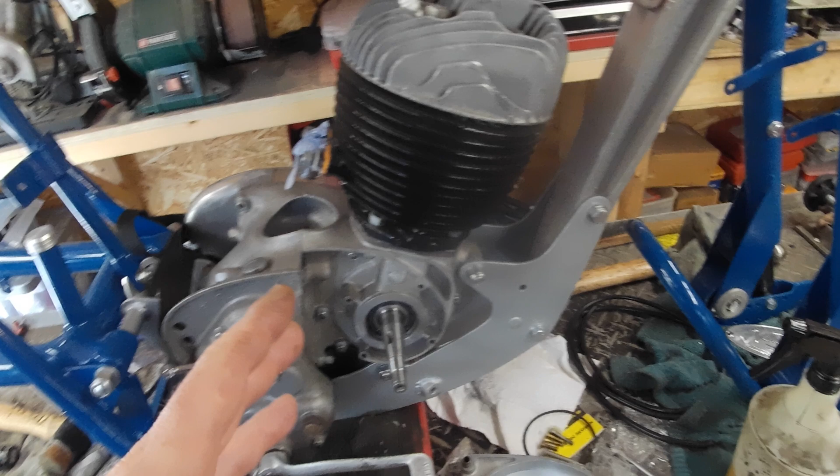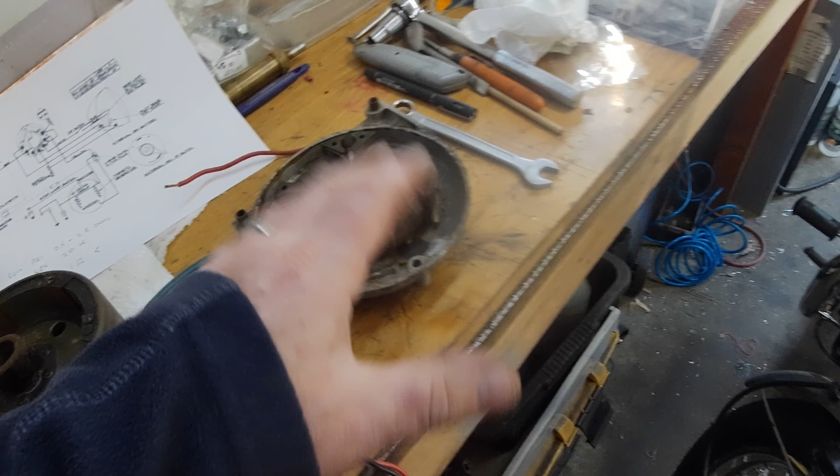Or just with the condenser, change it to a, you should be able to fit one in here, I think, like a car type condenser, or modern motorcycle type condenser. That's one option you can do, which is probably what I'm going to do.

And the other failing is with the pickup. I can just see that in there. So your normal HT lead would come in through here, and sort of like a spring-loaded carbon pickup onto that little bit there, little dimple in there. The way around that, because that is a major point of failure, that carbon pickup.

I remember years and years ago a mate of mine had a Greeves, and yeah, most things ran okay apart from that, it would just occasionally fall out and you'd lose all the ignition. Then you'd have to fiddle around and mess around with that. So the way around that is just to directly solder your HT lead onto there and do away with the carbon pickup and all that. Yeah, so that is what I'm going to do to start with anyway.

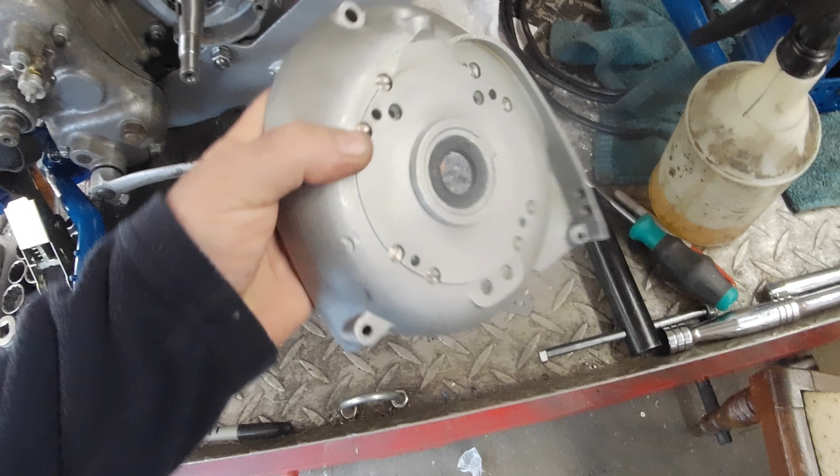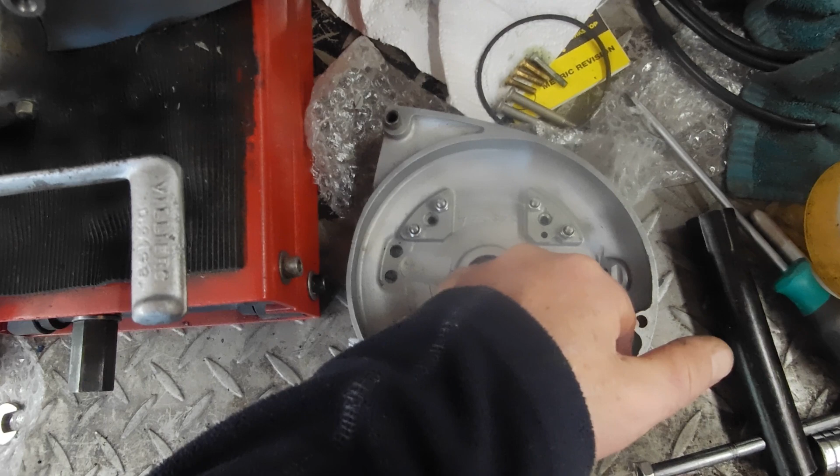I'm going to use this. This is the one that came off. It's in a slightly better condition than this. I mean, this probably would clean up, but I'm just going to remove everything from there and replace it onto there. That's also got a new oil seal in there as well, so I'm going to use that one. Yeah, I want some Delrin, just going to make up a little plug to go in here, bore a hole in for the HT lead to come through, so that will solve that little issue there.

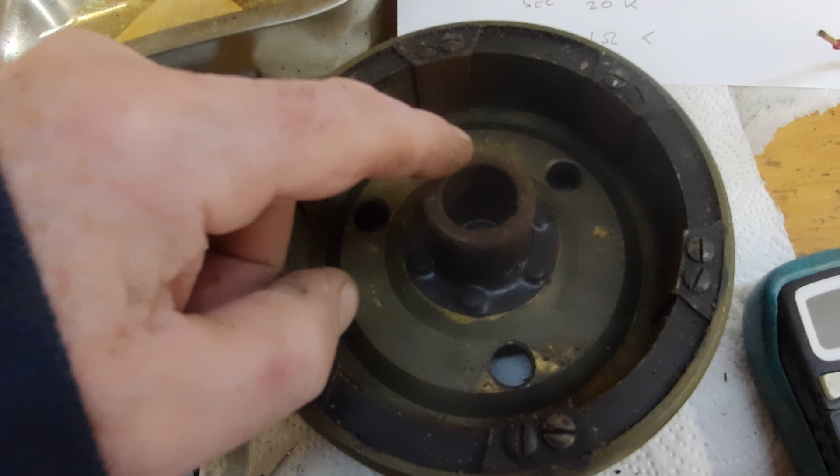Yeah, and there's the mag. Looks rusty around here. There's a bit of rust around here. That'll need a bit of clean up, but actually the taper is smooth. There's no rust in there. That's a nice taper. So that should be okay. And we do seem to have plenty of magnetism. So yeah, I think we'll be okay.

This obviously needs a good clean up, as does everything in there. That, hopefully that thread will be okay. Yeah, so I think that'll be the first thing I'll do. I'll just give this a good general clean up. Oh yeah, I'll just test the coils as well. We'll have a look at those.

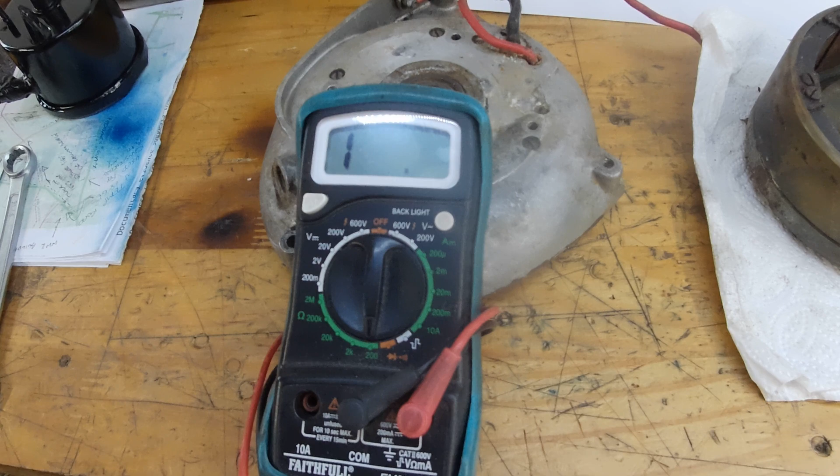Couldn't find an exact measurement for the lighting coils, but apparently as long as they're under 1 ohm, they should be okay. And primary on the ignition coil between 0.5 ohm and 2.5 ohms. Secondary should be 20k. So we'll just have a little look at that for interest. Set that to 200 ohms. If I can get that in shot somewhere. There. We'll do it. Right, let's just get a nice ground somewhere.

Point 0.5, 0.3, yeah, so we've got continuity. I'll drop 0.2. 0.3, 0.2, yeah. Right, let's try the other one. 0.5, 0.4, 0.4. Yeah, so they should be okay. Right.

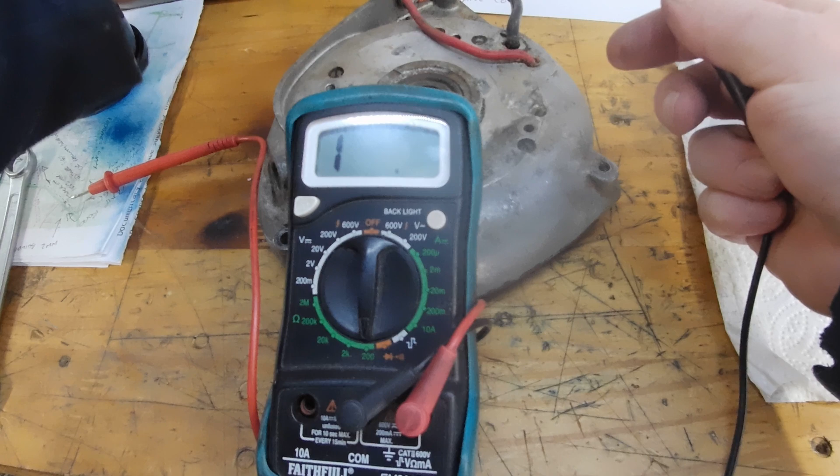What have we got on here? Looks a bit heavyweight, that bit of wire. On there. Point 7. Point 6. Yeah, so that's within spec. That's the primary. Right, to do the other one is a bit more tricky.

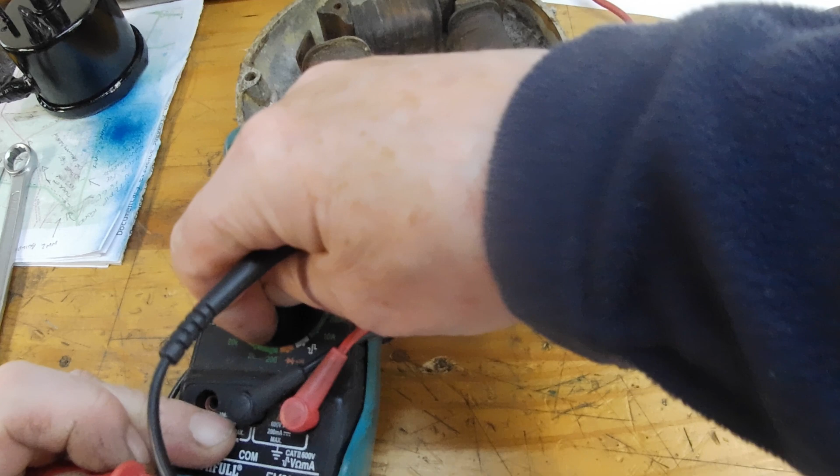Right, set this to 20k. Get a good contact there. Well, nothing. Let's try 200k. No, I think that is no good. Nothing on the secondary at all. Let's just try continuity. No. So yeah, just as well I ordered that HT coil.

Right, so the next thing, I think, start stripping these off. That don't look that good. Right, I want to reuse this socket, this little connector here. I have to just desolder these. My battery is getting a little bit, yeah. Need to charge my battery up, I think. That should be steady green light. Fired up the main soldering iron while we're waiting for that battery to charge.

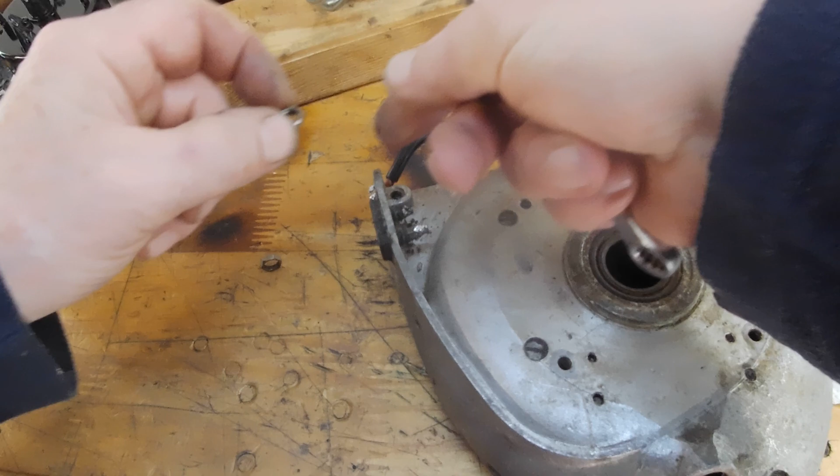That's some funny old solder on there. To throw a bit of modern stuff on it to get it to go. There we go. Right, clean them up later. Soon that just pushes out. Hasn't been glued in. Yeah, some sort of gunk around it.

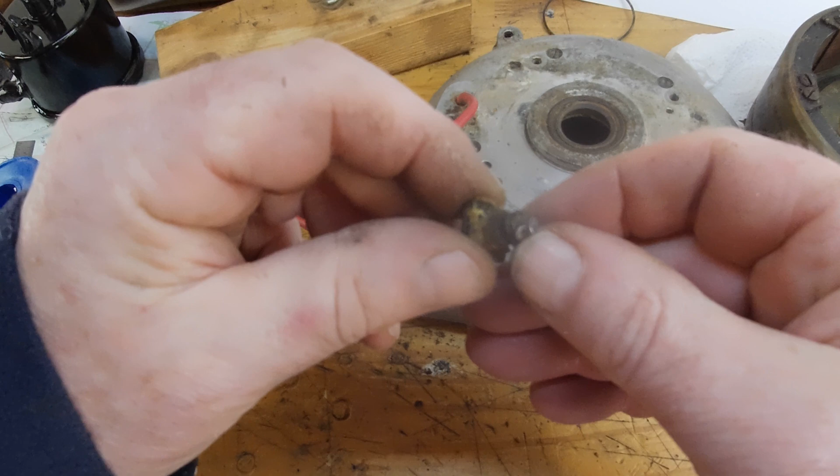These separate individual things. Oh, they are actually. Thought that was a pair. Looks like they're individual. Right. That was one that looked like the thread had gone a bit. Yeah, I'll clean it up a bit first, I think. Right, that's those off. Right, coils. I need to keep these end pieces, I think, if I can reuse them. I will. Right. Screwdriver.

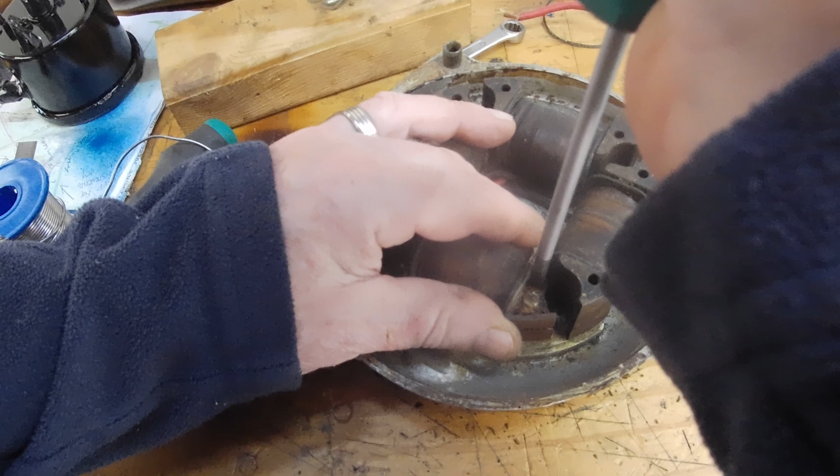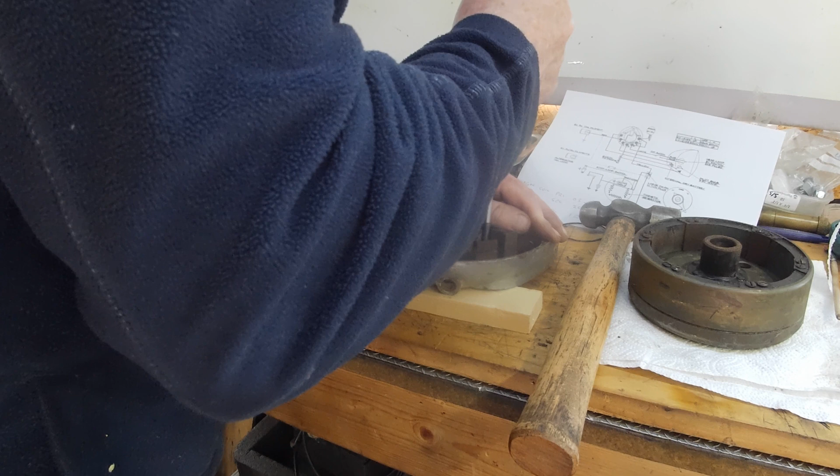Oh. Tight. Right, might have to break out the impact driver, I think. It's moved. Loose. Loose. These ones need a bit more.

That one. It's just this last one is a bit. That one does not want to go. Oh, hell no. That's always the last one. Might have to drill that one out, I think. That does not want to move.

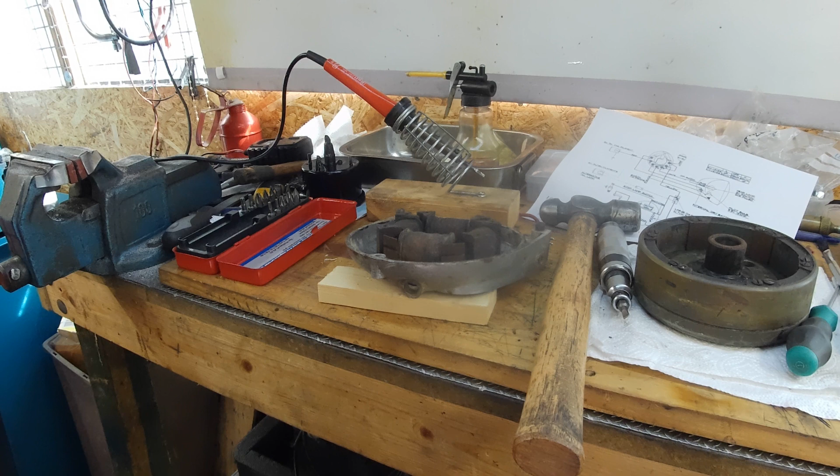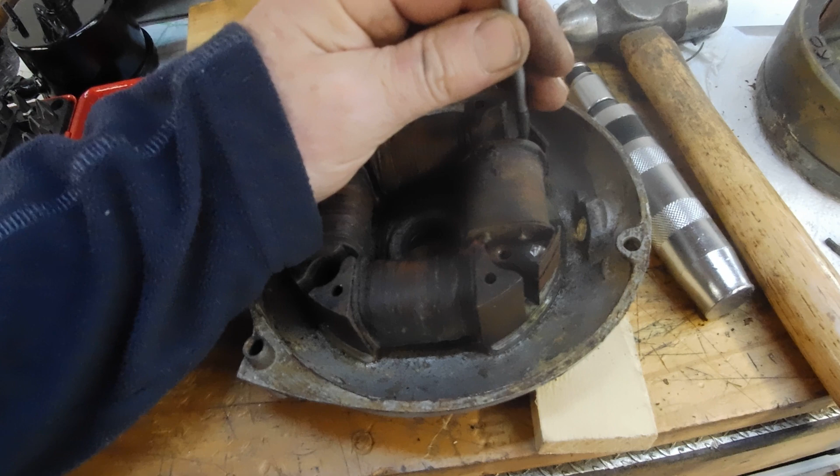No, that ain't going to go. Drill that one out. These other ones are all loose. Just that last one. Yeah, I'll leave them in place while I just drill this out, I think. Pretty corroded. Threads are right, it's just the countersink and the shank.

Ah, different sizes. Right, hopefully. Can I move this now? If I can ping the end off, because that is still under there. Might need to drill a bit more off there, I think. Try not to go too far because I don't want to upset the countersink. Yeah, I'm going to have to drill in there again.

Right, got it off. I thought these were reusable, these ends, but perhaps they're not. Perhaps I need to get new, perhaps they changed the design or something. I thought these sort of come off, because the new coil has just got pins on the end, so you need some sort of mounting. Yeah, they don't seem as though they're removable, so all that was a bit pointless. I suppose I can get the little bit of mica out of there, the insulation. Can reuse that.

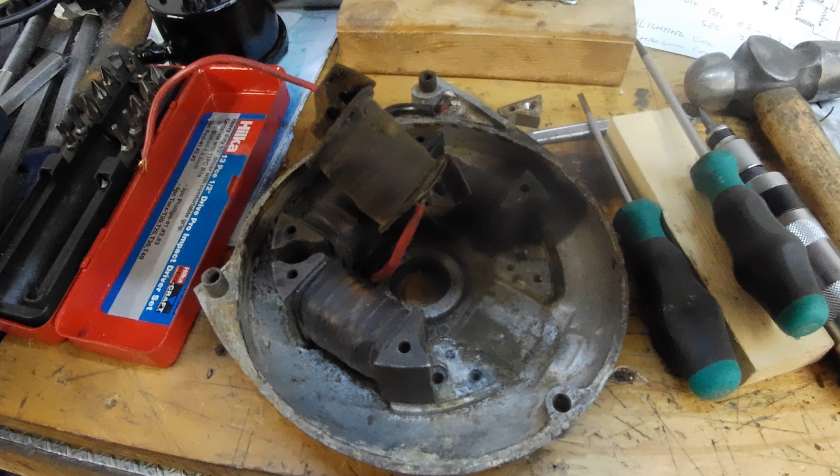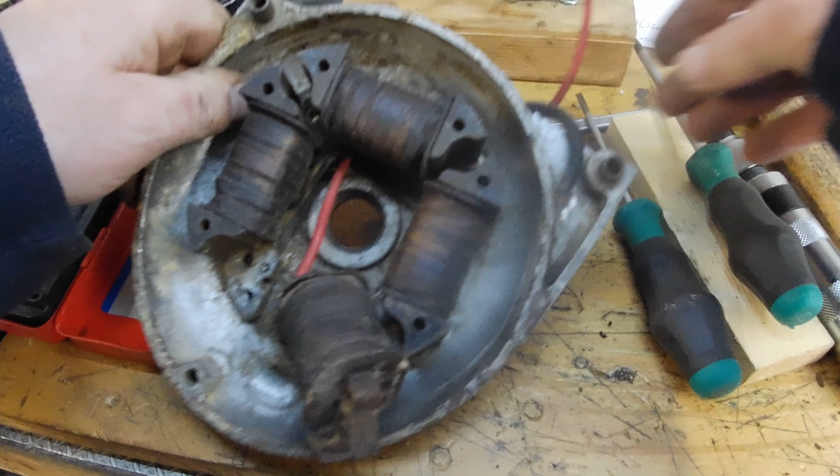Yeah, couple of the screws I can reuse. Yeah, that's why I was having trouble drilling that out. I didn't exactly get in the centre. That don't really matter. Yeah, I think I do need those, so we'll keep those. Yeah, coil is off. There seems to be a load of sort of gungy stuff here, where someone's tried to seal the wires up, the looks of it.

Yeah, I don't quite know what that is. Right, I should be able to get this. Can I get that out there now? No, I need to remove these, I think, first. Yeah, I mean, you can see the little contact there better now, where the little carbon bit sits. Right, I'm going to have a look and see if I can actually get... Oh, that's off. Solder's broke. Yeah, see if I can actually get these, because they don't seem to be removable.

Right, these other ones come off from the rear, and do I want to number them? No, I shouldn't need to number them, because they'll be connected to, one's on the yellow wire, one's on the red wire. Yeah, they just screw in from the back, and let's hope that they aren't so difficult to undo. Well, that moved, I saw it. And that one. Right, I'll just carry on round and release them all.

When they work, they really work. We're going to have a last screw scenario again. Oh, shit in there. Loose, loose, loose, loose, loose, and loose. Right, okay, I'll get those off. Right, screws are all out.

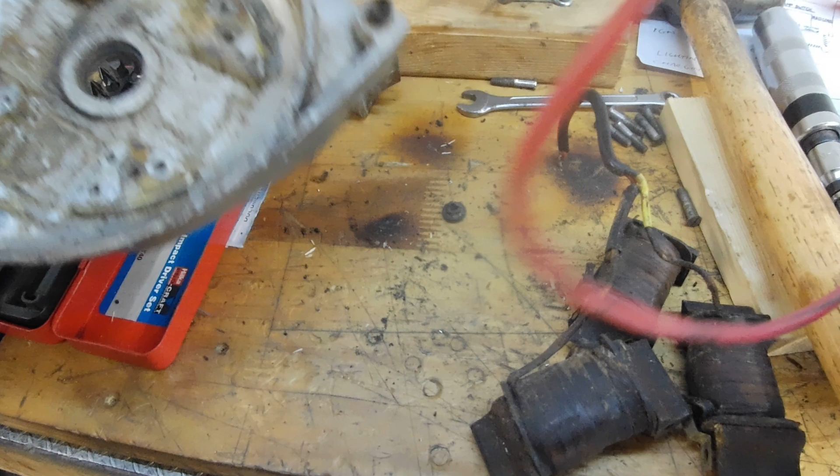Some sort of earth there, yeah. These wires might need replacing. What's that? Oh no, it's a bit of sleeving. Right, coils. That's probably why that gunge was there. Probably should be another little grommet on that one. Right, that's that lot off. I shall now need to do a little bit of cleaning, which you won't want to watch because that's boring. And well, that wire is damaged there. Actually, I'll probably need to replace these wires, I think.

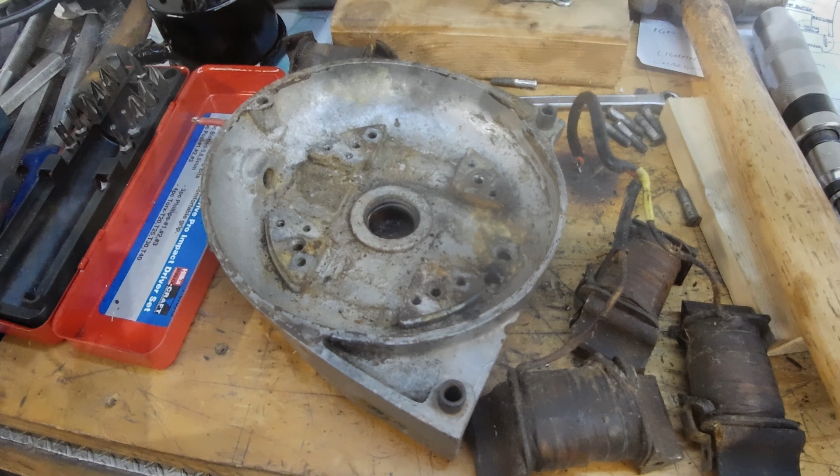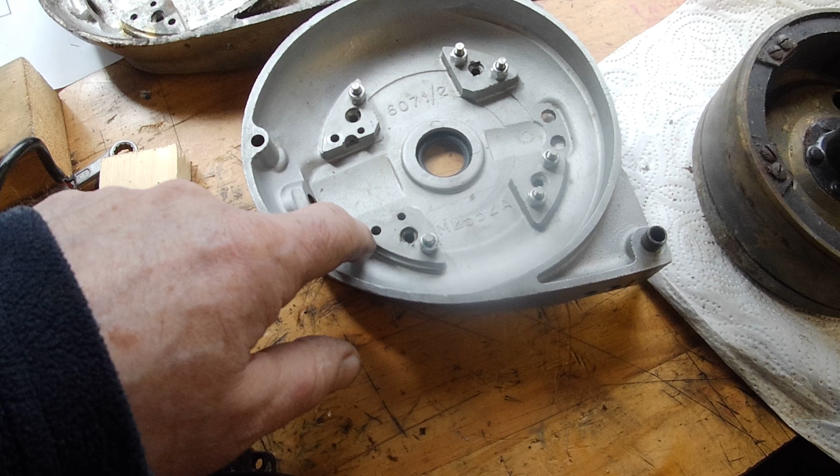Right, a little bit of a problem if I want to use this. I've just removed the screws that were in these fixing holes, where that will go, and someone has drilled out the threads. So they should be threaded like they are on there. The other ones come through from the other side, so it doesn't matter. So that's a bit of a problem because there's just not enough gap there to get a nut on the top if you want to come through from the other side with a screw or a bolt. You'd never get a nut on the top unless you milled a bit away, and I'm not sure how much I'd have to take away.

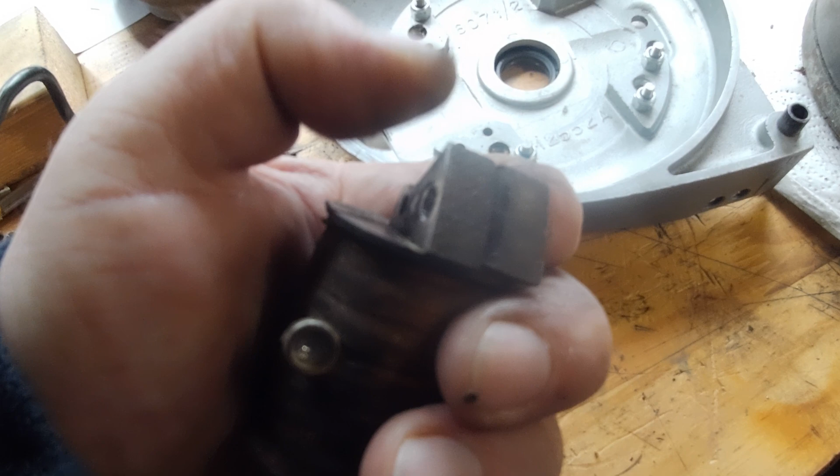I really took a little bit off that one because that's where I did a little bit of a repair, where I drilled that in the wrong place. I just had to sort of plug it. Unfortunately, that did wander off a little bit because this laminated part of the bracket is a little bit softer than the steel I put in, so it was trying to pull one way, but it'll hold down, that's not a problem.

Yeah, so I'm going to have to clean up this one, which is not in as good a condition as that one, I don't think, which is a bit of a shame, but there we are. And I'll also have to take the oil seal out of there and put it in here because this one is no good. So yeah, a little bit of a clean up to do, and also these want a little bit of a clean up, and I am going to do a little bit of rewiring.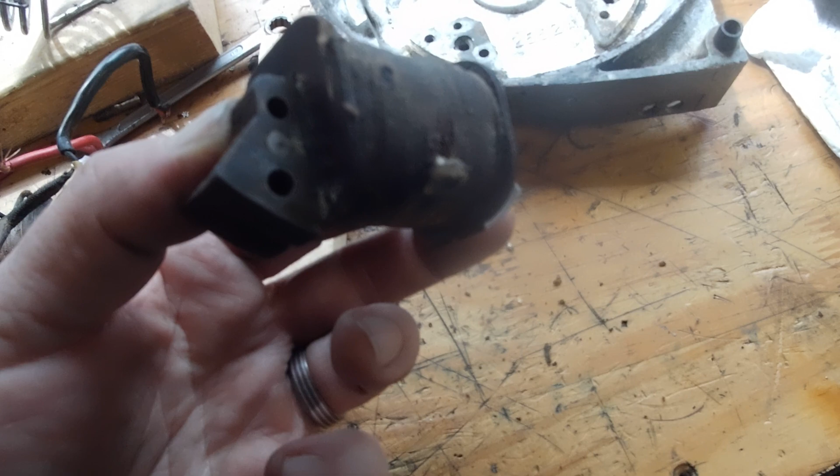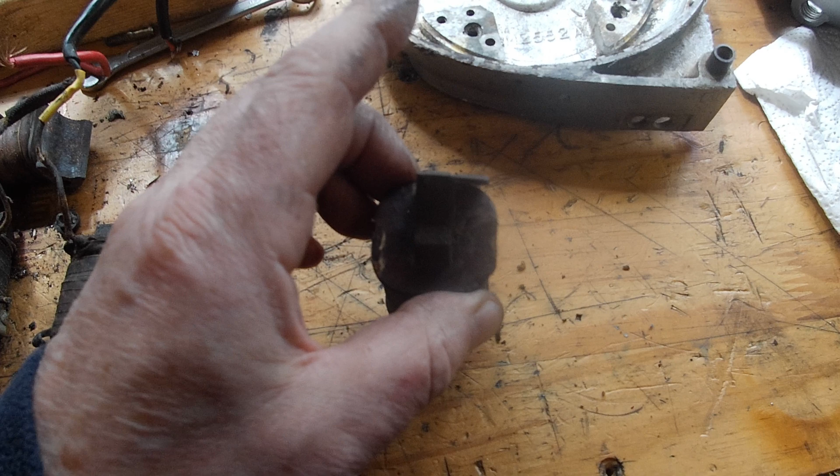I think it's this coil here, yeah. I think I'm going to put this coil in parallel with the primary on this, unwind the secondary, and I'm going to fit an external coil. Yes, because the coil I ordered is not correct. I'll show you when it gets here, but it'll fit the other Villiers engine I've got, but won't fit this because this is a sports coil, competition coil. It's different to the one I've ordered.

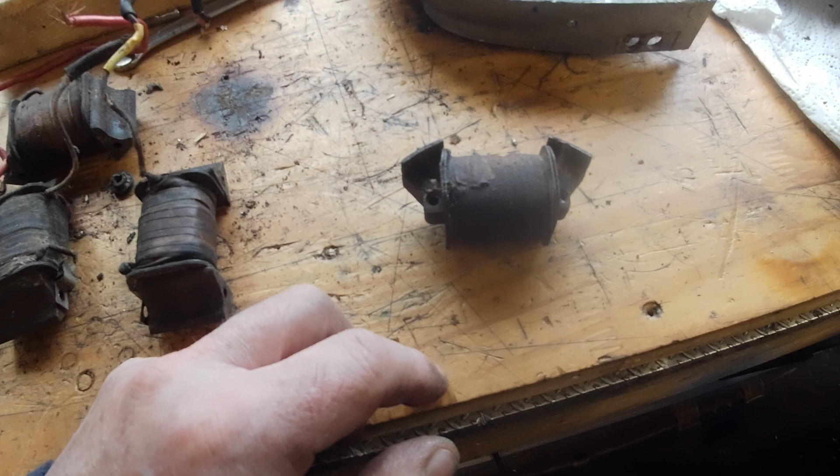If you want a new one of these, you have to send in the old one, on a return basis. And as I've had to do a little bit of re-drilling there, they may not accept that. So yeah, it's sort of plan B really. So we'll have a look and see. Well, it'll be interesting anyway to unravel this, unwind that, and see what's inside. And that is also going to need a little bit of a de-rust as well. Yeah, but first I think I'll get on and clean this up.

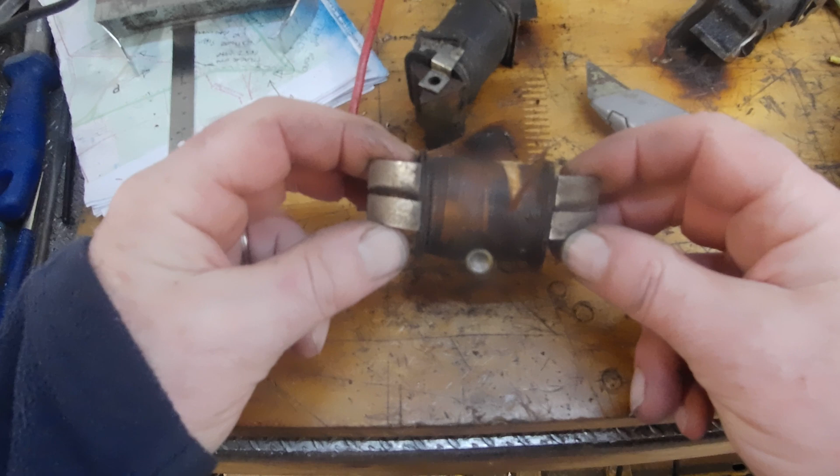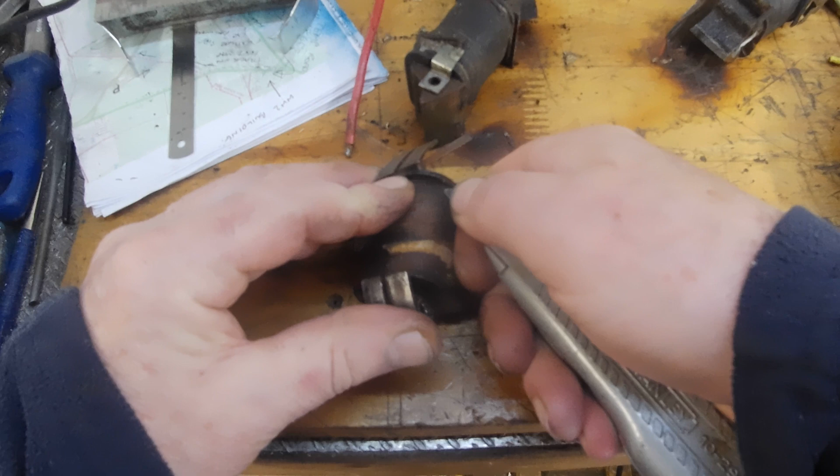Right, I'm now going to start to disassemble this. I think I'm going to have to cut this off first. Stanley knife is a bit blunt, but I can get it started somewhere.

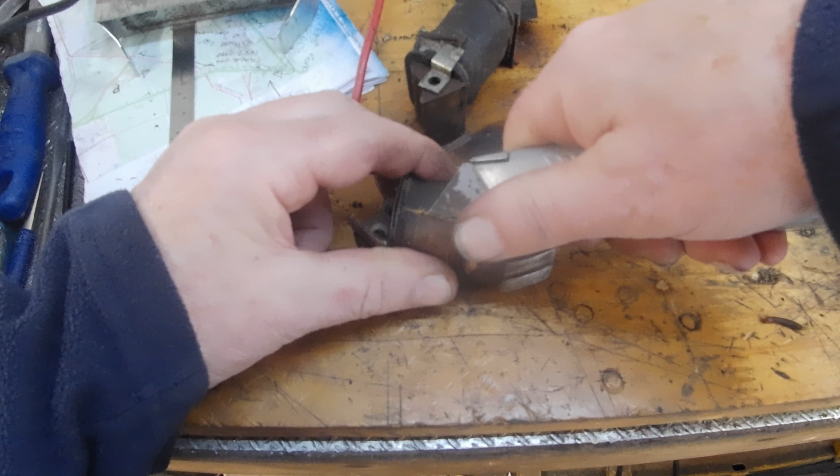Start peeling it back. I know when they rewind them, they go straight in with a chisel and just lock the whole thing in half, but as I want to retain the primary winding, I just need to be a bit more delicate with it.

Right, this might take some time, so I will just get the camera out of the way and bring it back when I've peeled all this off, but you can kind of see how difficult that is. Right, so I've got through the first wire.

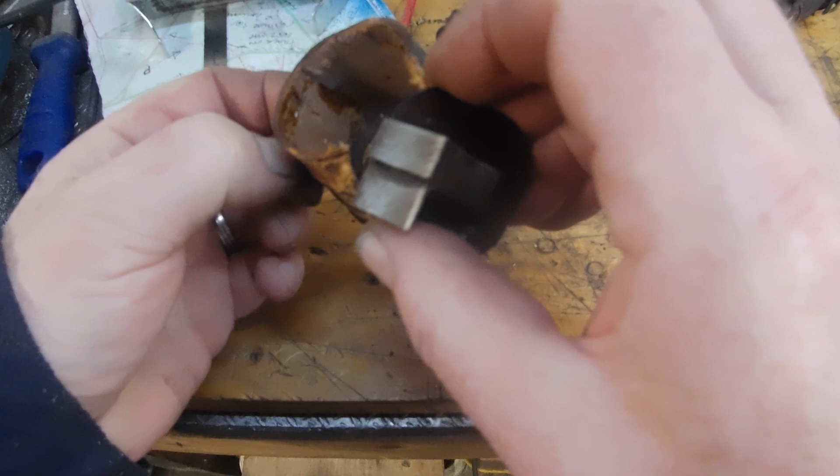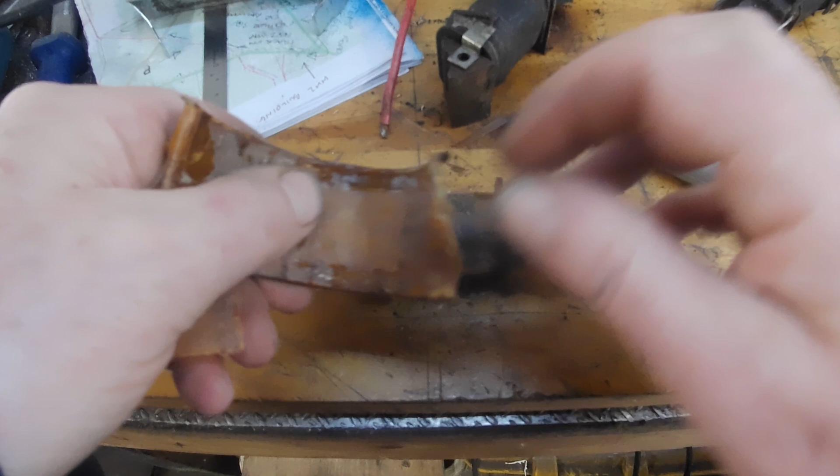Yeah, see, there's the pickup. Can't see the other end of the wire. Perhaps that was where the problem was. Now this is really, really fine stuff. Yeah, I can't even see whether... I think there should be a bit of tape behind here, a bit of copper tape. A bit of plastic.

Yeah, can't see where that was come through there. Oh, there's the wire. Oh look, cut right through it. That'd be along my cut line, wouldn't it? Yeah, can't see it. Pretty well soaked in varnish, give them that. Yeah, it's just a matter of gradually peeling this back, I think. Right, I'll carry on and get a little bit further with it.

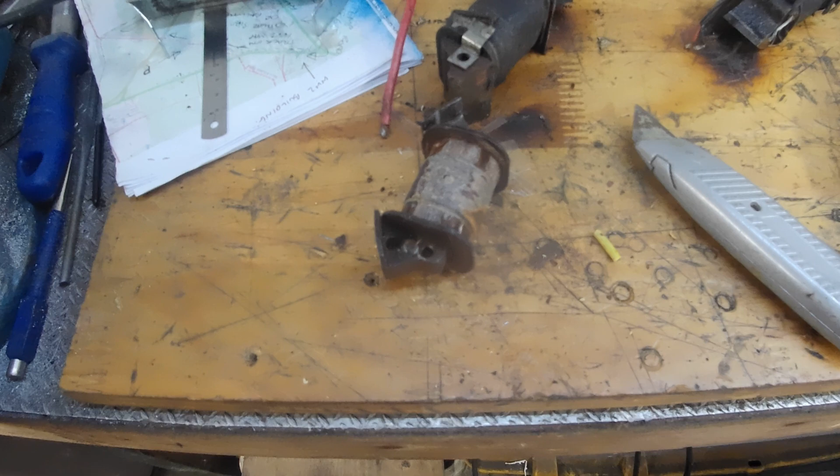Right, I think that's about as far as I dare go. It does look to me like that layer coming up there, that's not a scratch there by the way, it's a wrinkle in the varnish. It does look like that is heavier gauge wire, so I think I'm going to stop there. Quit while you're ahead and all that. And we have still got some continuity. 0.8, 0.7, 0.7.

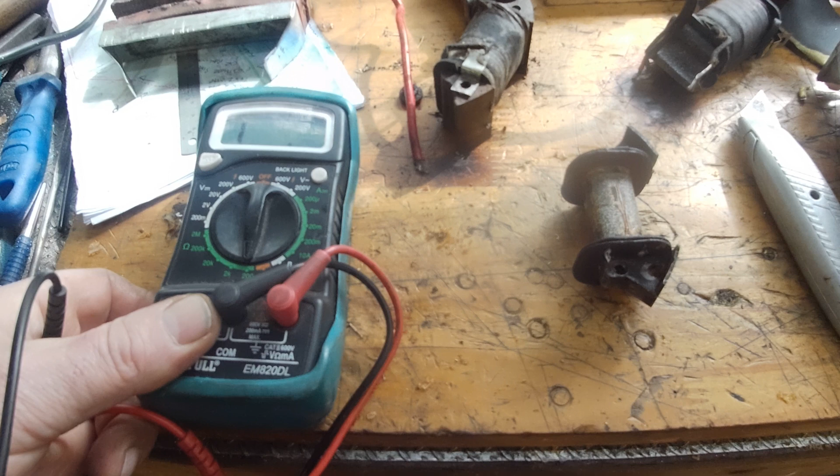Right, so what I was thinking about doing is pairing that with this, which is one of the lighting coils, which is 0.6, 0.5. So I was going to put them in parallel. So that one will mount on that side. That one will mount that side, and then the two lighting coils here, which I've yet to give a little bit of a clean up, can go on those two corners. That's the plan. Anyway, so I need to get some wire on here, connect that all up, and go from there.

Right, so there we are. I've got that one lighting coil wired through to there and out through there, so that will go up to the external coil that I'm going to fit, and hopefully that will give me enough juice to operate that coil. Right, so now I can get the other two fitted. Just need to give these a little bit of a clean up first, and fit another output wire on there. That's the other two lighting coils fitted, and a little tail. I've just got to connect up to the little output there, and probably just block the other one up. I only need the one, don't I?

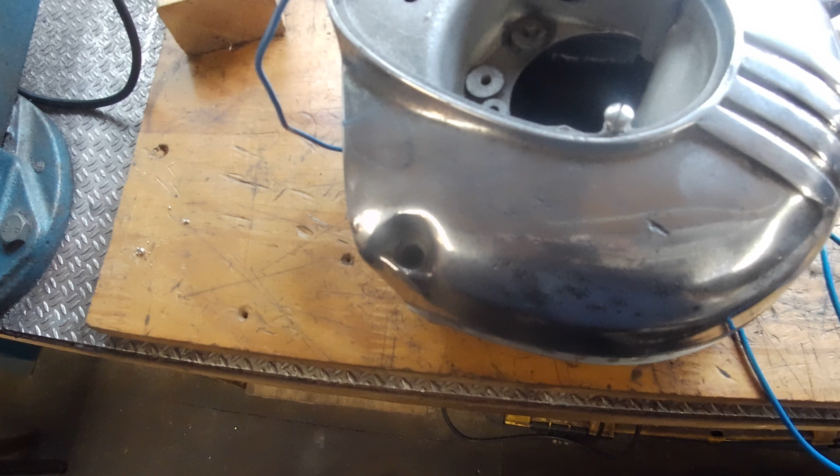Bit more wiring completed. I just teed in under there, another piece of heat shrink, this wire here, which will connect up to the points. So what I need to do is that is mounted on there like that. There's a little hole here which my wire will fit down. I'll do one-handed, so that can go through that hole to pick up the points, which will be in here, and then I'll just need to have a little connector there, so I can plug it in and out as required. So that'll be the next bit to do.

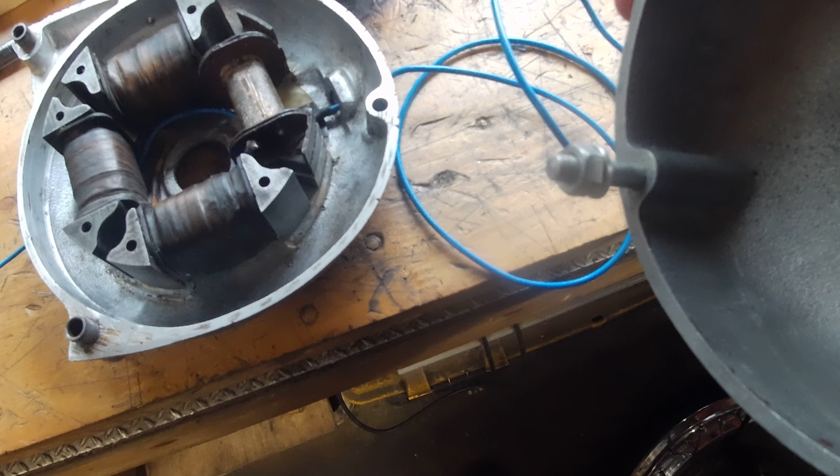And the other thing I intend to do is this stud on the back here, I'm going to use that as an earthing point. So that's at the front there, where that blue wire comes out as well. So what I'll do is just have an earthing point here, and I'll run it in with this wire paired together, and that can go up to the coil, so it can ground the coil.

Yeah, so it's all coming along. I just need to find another grommet for in there. Seems to only have had one that size, so I need to get some more grommets.

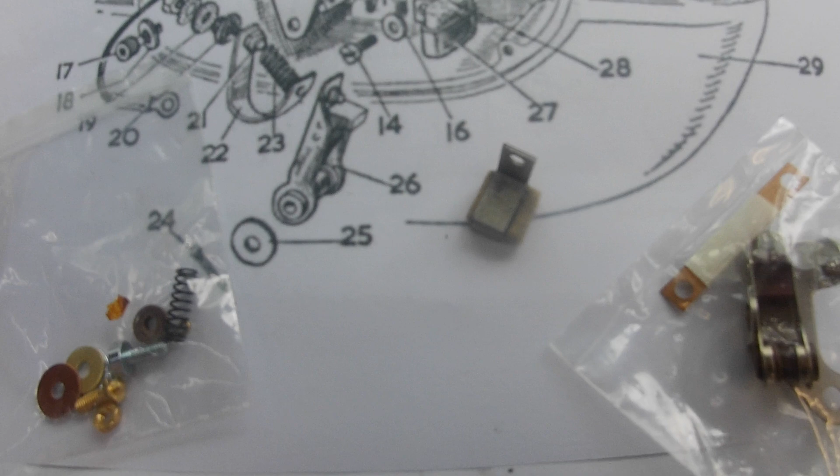I now need to fit the points in here, ready to go. Yeah, this is how I got it - completely bare, so I don't know how it all goes together. All I've got to go on is this diagram, which is a little bit blurry, not particularly good, and I've got a collection of parts. I've got the set points, got the little pad which I've already put the little felt thing in, which is that there.

That's easy enough to spot. Got a back plate, I'll see that, that's part of the points, and I've got this little fitting kit with a fibre washer, screws and springs and all sorts of stuff. So let's see how we get on. Hopefully you'll be able to see what's going on. I think I'll leave that to last because I know where that's got to go, so forget about that for a little while. I haven't said that might be really awkward to put that in last, but we shall see.

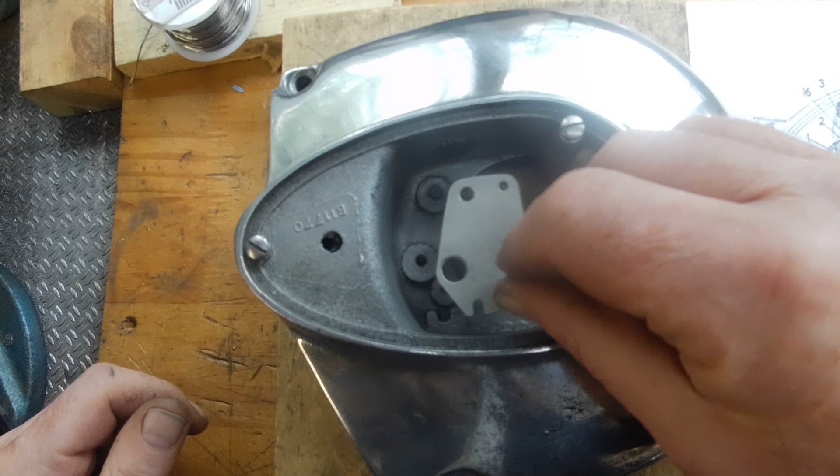Back plate, looks like it goes on that way round. A little pin there, I'm assuming that goes over there. Does seem to fit, lines up with these holes. Okay, that's easy enough, isn't it?

Right, points. Assume that's a little springy bit. Let's see a little bit of that on the diagram. Get everything in shot. Yeah, definitely see that, that little bit there on the diagram.

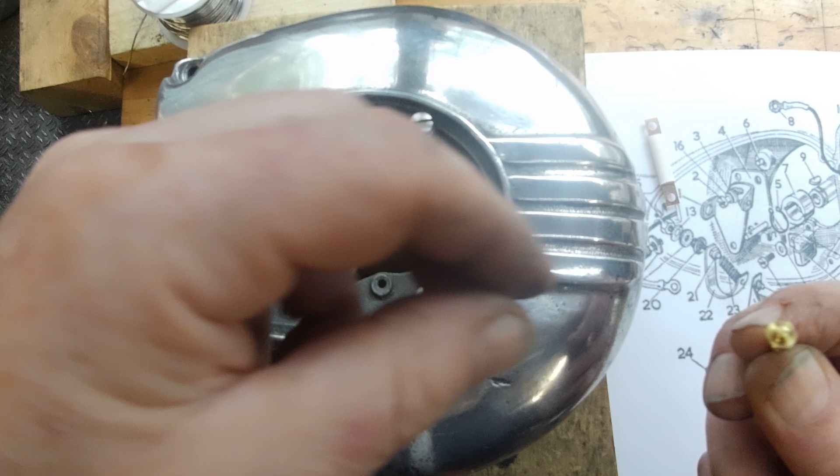So it looks like there's a little brass knobbly bit, which must be that. Looks like it goes through there. Then there's some sort of spacer, bush, insulator, not sure what. Might have to consult the old list, I think, and write down what these things are, because it could be anything.

So nearly got stumped at the first hurdle. I was trying to work out what this screw here is and the washer, and it seems to be for this hole here, which is not included in that fitting kit, and it's supposed to be an Allen head screw.

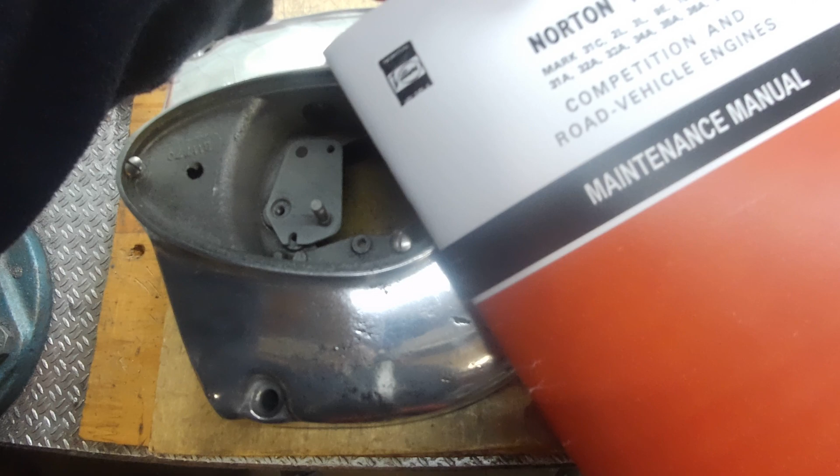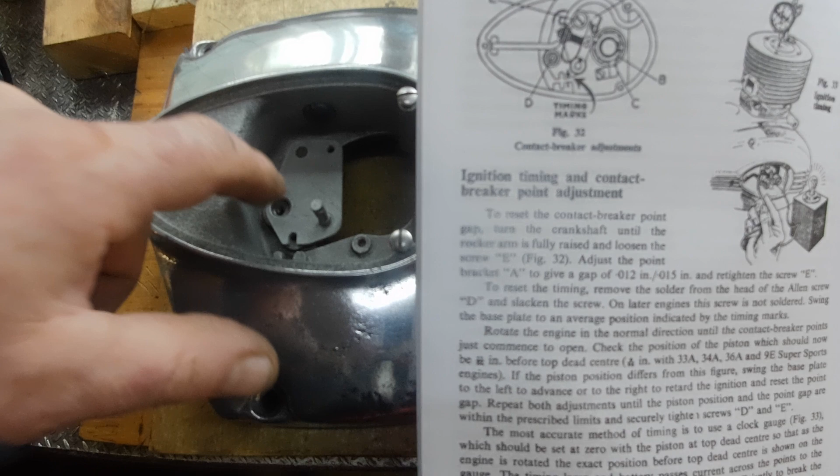As in the little old maintenance manual, well, I just read about how to time it. It says to reset the timing, remove the solder from the head of the Allen screw, D - yeah, which is that. Slacken the screw. On later engines the screw is not soldered. I don't even have the screw, so I found the part number for it, but it doesn't seem as though you can get them. I couldn't even find a picture of one, let alone what thread it is, although a 4BA does seem to fit.

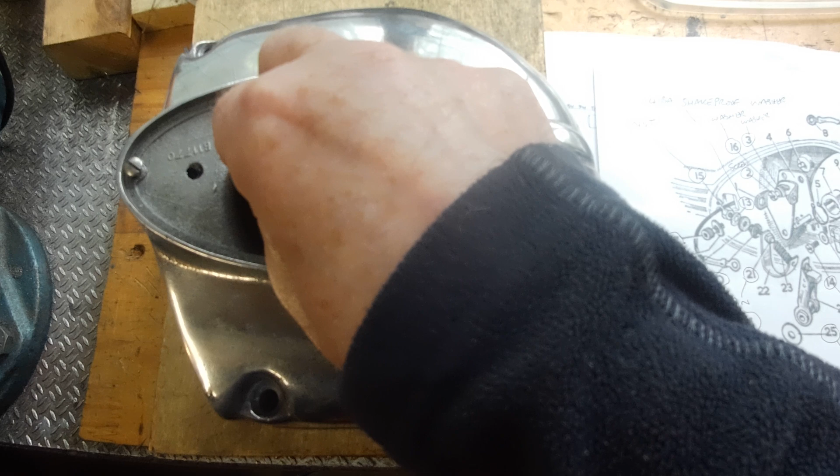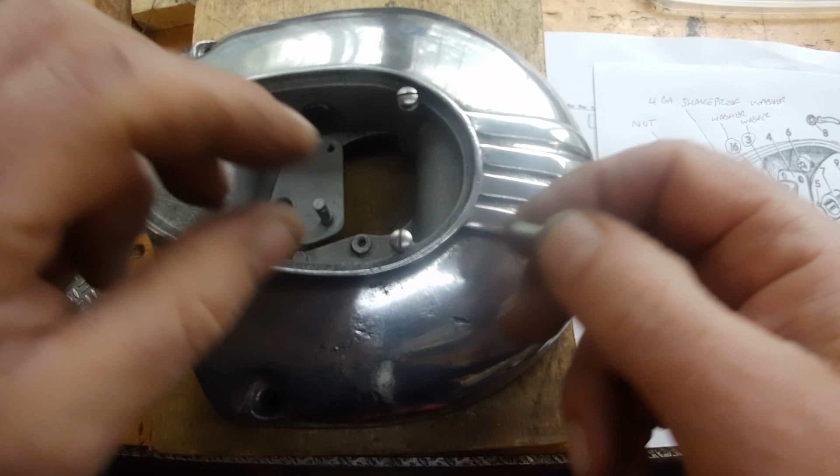So I found a screw. It's not Allen head, it's flat head, but I can't find a washer big enough. Typical, isn't it? Foiled by a washer. But I did find a large headed 4BA - 2BA, sorry, it's 2BA thread.

Phillips head screw. So for now, until I can find a larger washer, because it's not ideal, this screw really, but for now, just to hold it in place, it will do. I can always replace that at a later date, but at least I can actually tighten it down, get on and do what I want to do. Right, so that's that.

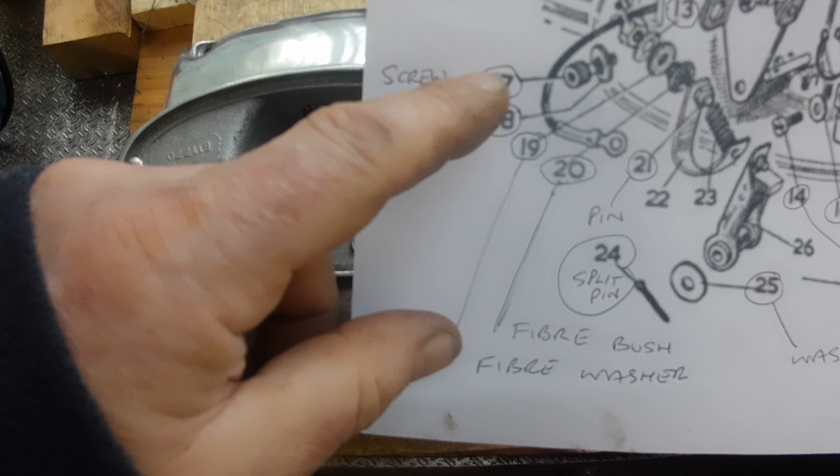Yeah, so I've now marked on this printout what everything is. I think the first thing to assemble is everything that goes on the end of this spring piece here, which I'd start to do with that. So what we have is that. Then we have a fibre bush, which is that - sort of like a top hat bush. Looking at the picture, seems to go on that way round. Right, so that's that.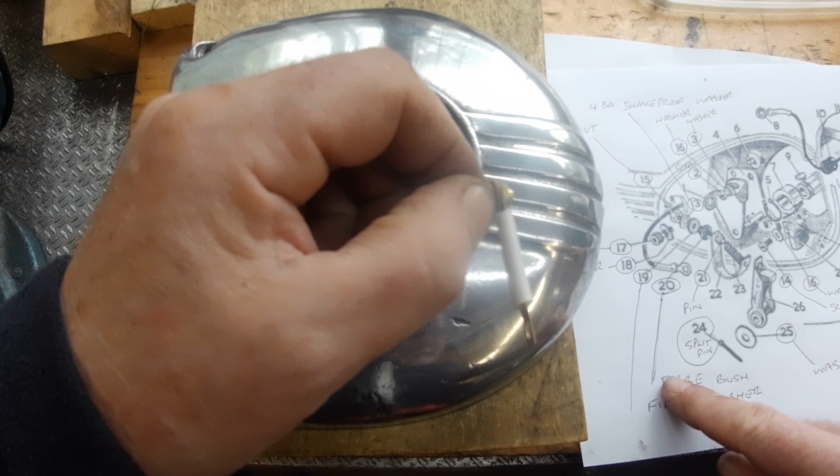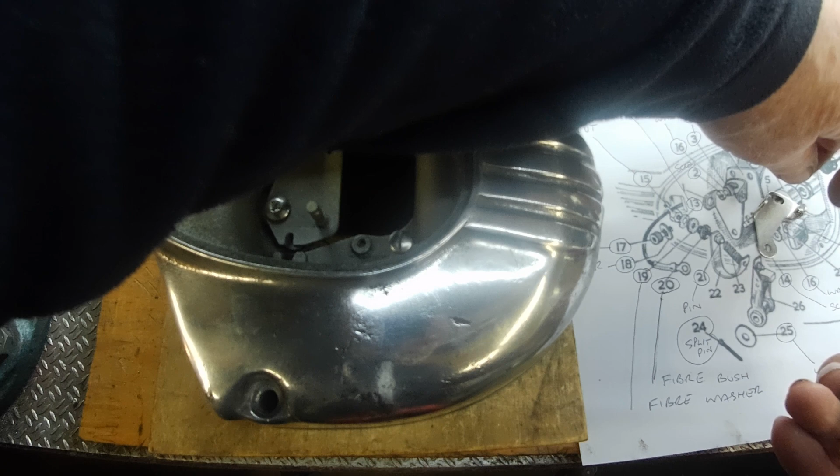So then the next bit is fibre washer. Now I'm going to assume that this bush goes in that hole on the points plate, because there'd be no point in putting another fibre washer unless it was actually going through something. So the other fibre washer in this kit is this one. So I'm going to assume that is the one. Fibre washer. Next bit is...

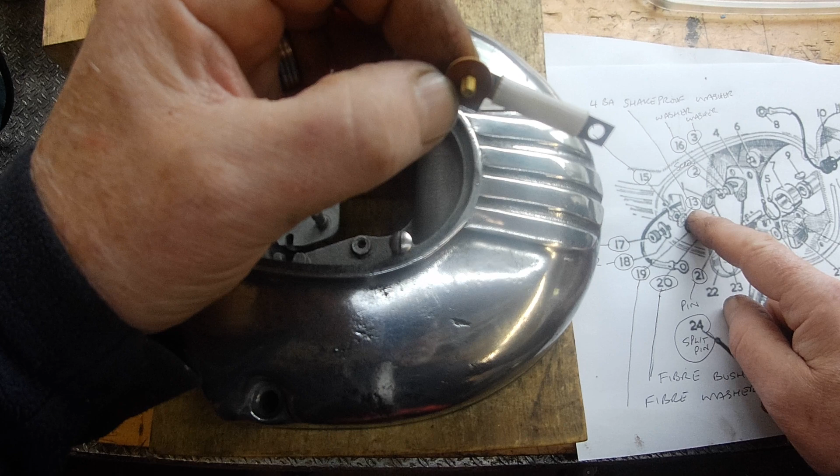It's got a 4BA shake-proof washer, although there doesn't seem to be a shake-proof washer in this kit. The only other thing there seems to be is a brass washer, which is about the right size, so I'm going to assume that that brass washer needs to go on there. And then a nut.

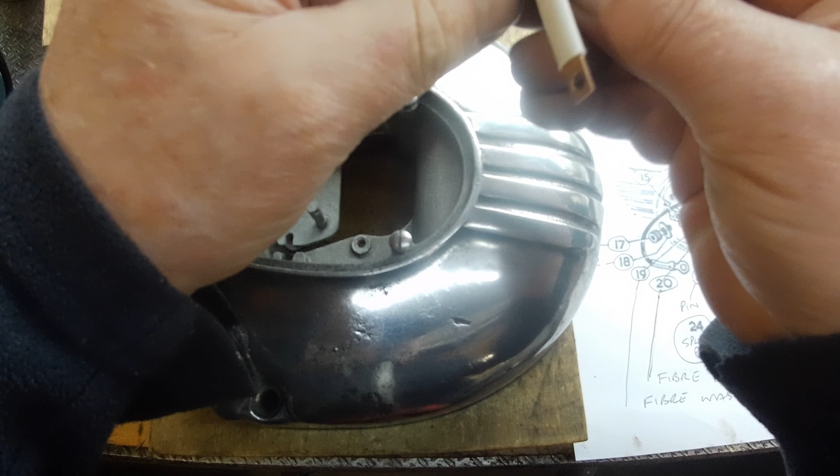Right, so that can all be tightened down, but I think you've got to be careful not to over tighten, because that is only a brass fitting in there. Right, so I'll give that a little nip up. Right, so that's that bit.

So this obviously needs to go on. I think this needs to bend round actually. Is that spring? Yes, it is like spring.

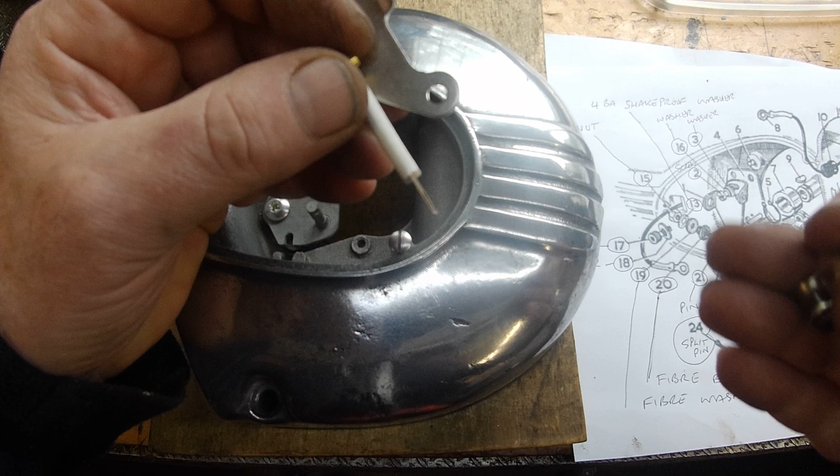Yeah, so that is your other contact, which is going to go on that way round. So that needs to be bent round. A spring needs to go in there. You can see bits are going to go all over the place, can't you? Yeah, so this little spring needs to go in there.

On the other side of this little, is that a spring or is it just, maybe it's just a contact. Yeah. Onto that little pip on there, I would assume. Yeah, so that needs to go like that. That needs to go like that. Oh, not even in shot, am I? Right.

There probably is an easy way to do this. Right, without that pinging everywhere, I need to get this on this post. Like that. Okay. That looks about right.

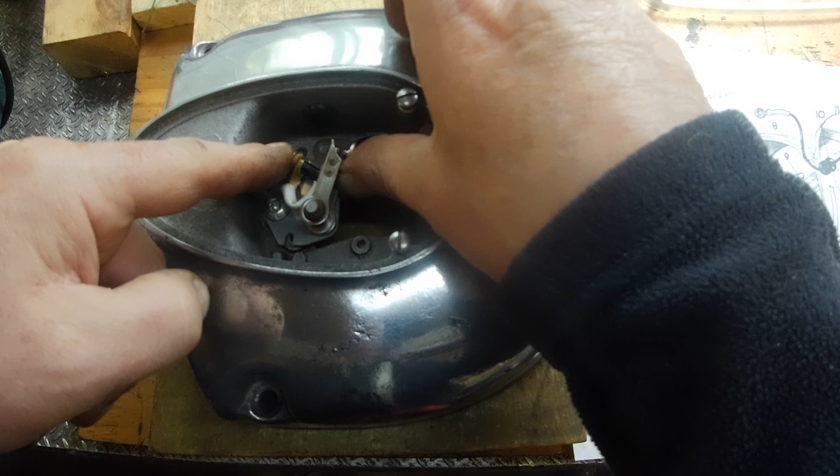A lot of tension on that spring. And to hold this on, there is a washer and a split pin. Washer. Split pin.

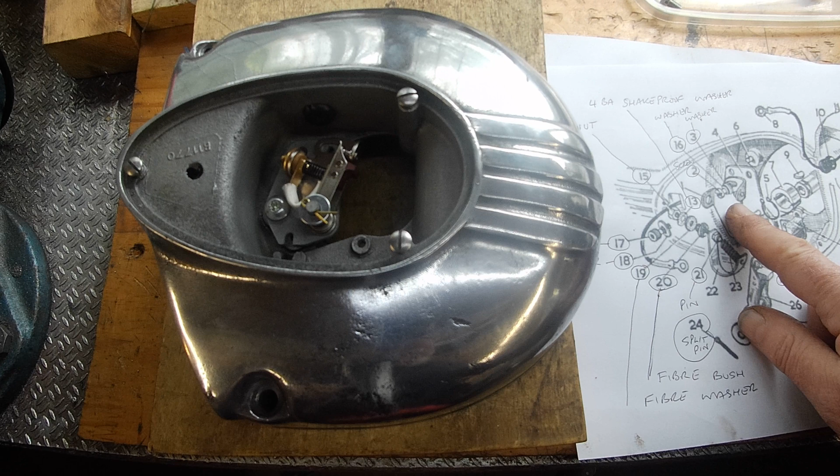Right, I'll just half bend that for now, just in case we have to take anything off. And the final thing is, where are we? A little screw here, which is supposed to have a washer, which I've run out of washers in the kit, so yeah, let's just put that in without a washer for now, and we'll have to find some suitable size.

What have I got? Let's just have a look, see if I've got any really small washers. Right, we're in my quest to find a little washer to fit this. Could have been a little bit bigger, but that will do. And that is a metric one, so it's not quite right. I found a washer to fit that. Yeah, like I say, that is also metric, but yeah, that will do for now.

So I'll swap this little crosshead one over and pop this little cheese head screw in there. Like that. Yep, change this over.

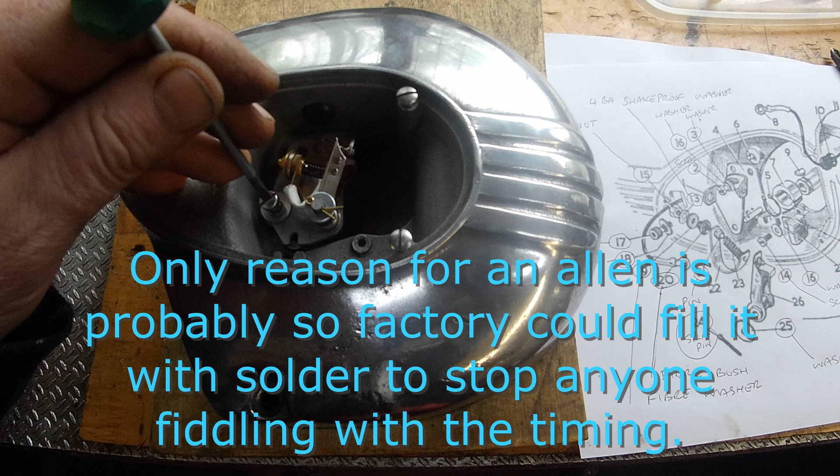And I'll see if I can find a, what did I say it was, 2BA. 2BA little Allen screw to go in there, if that's what it's meant to be. So that's for your timing, and that's for your points gap, neither of which I can set at the moment.

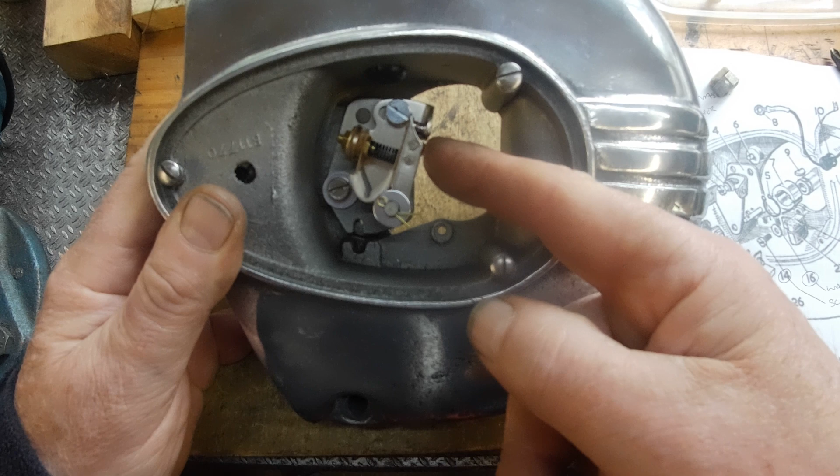So the only thing left to do is fit that in there, which I need a screw, which I need to find out what size that needs to be. Yeah, well, there we are. That's the points fitted.

Yeah. Oh, no, I've done. I also need to fit a wire on here, don't I? Of course I do. What an idiot. Right, I'll make up a short piece of wire and fit that on there. Which means I'm probably going to have to take this off again, because it's going to be a little bit easier, I think, to fit that. Yeah.

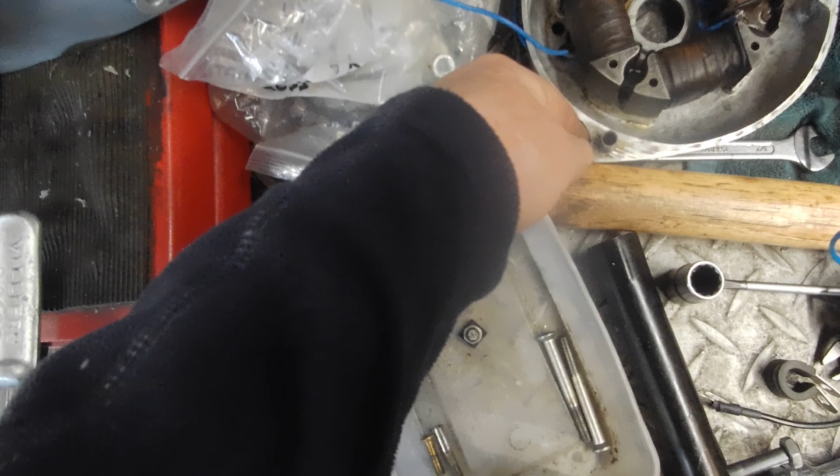Okay. Low tension wire connected, ready for linking up with the other bit, with that bit. Not that bit. Yes, that bit. Just need a grommet to go in there. I can push that through, can then put a terminal on each end of those wires, and they'll be ready to connect up then.

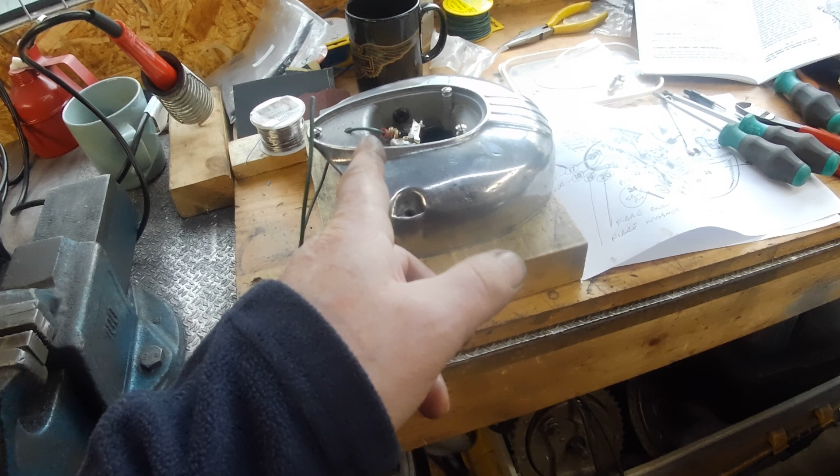So I think that is it as regards to points. I'll give this another little clean up. So once I've got everything ready, so I'm waiting for a grommet, or I need a grommet for that, one for that. What else? Oh, oil seal. Yeah, oil seal. Once the oil seal is in, grommets are in, I can get all this back on.

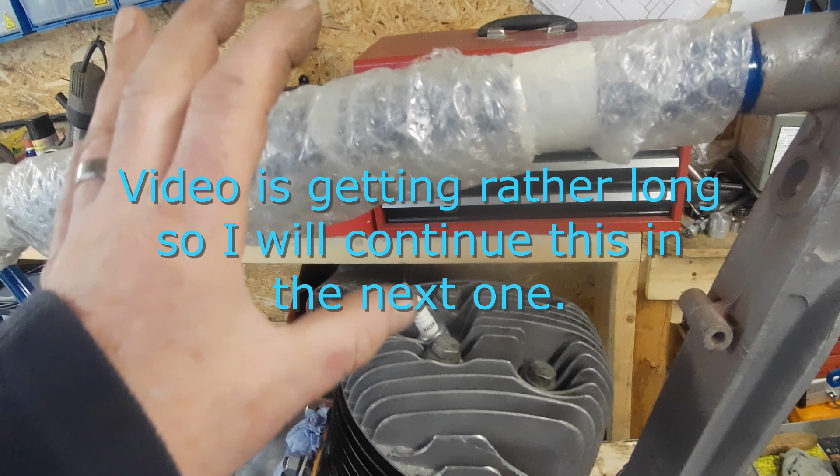I've also ordered some heat shrink, so I'm going to put all this in heat shrink so I can run it up the frame to where the coil is going to sit, which I have got somewhere. Yeah, and I just need to mount some sort of P-clips just to hold the coil up there, and the condenser will go up there as well. So yeah, we're sort of kind of getting there really.